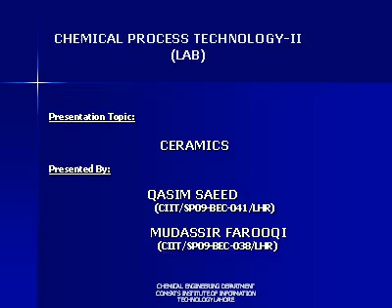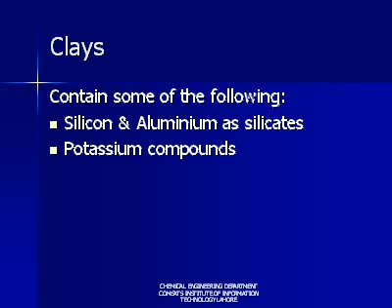Ceramics are a wide-ranging group of materials whose ingredients are clays, sand and feldspar. Clays contain silicon and aluminum as silicates, potassium compounds, magnesium compounds, and calcium compounds. Sand contains silica and feldspar, or aluminum potassium silicate.

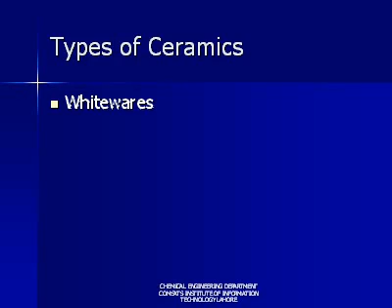Types of ceramics include whitewares, refractories, glasses, abrasives and cements. There is a comparison between metals and ceramics, given on the basis of crystal structure, number of free electrons, metallic bonds, electrical conductivity, atoms, tensile strength, shear strength, ductility, strength and hardness, etc.

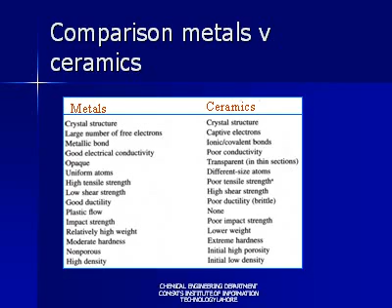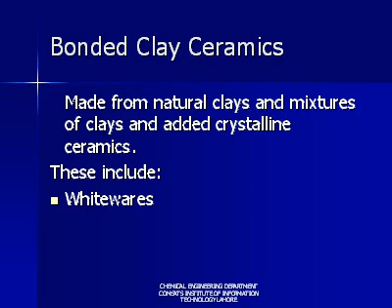Bonded clay ceramics are made from natural clays and mixtures of clays, plus added crystalline ceramics. These include whitewares, structural clay products, and refractory ceramics. Whitewares include crockery, floor and wall tiles, sanitary ware, electrical porcelain, and decorative ceramics.

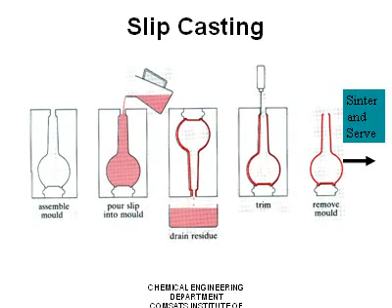Slip casting is a technique used to produce different types of ceramic products.

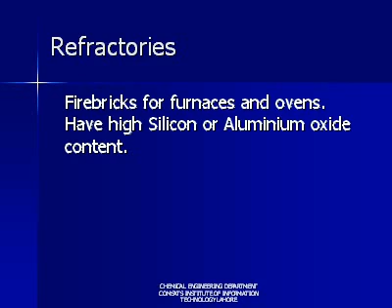Refractories, such as bricks for furnaces and ovens, have high silicon or aluminum oxide content. Brick products are used in manufacturing plants for iron and steel, non-ferrous metals, glass, cements, ceramics, energy conversion, petroleum and chemical industries. Refractories are also used to provide thermal protection of other materials in very high temperature applications.

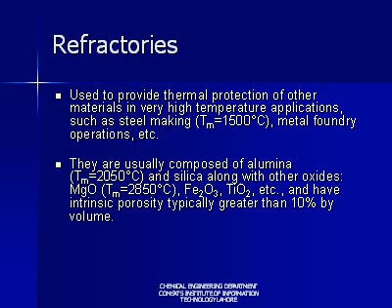They are usually composed of alumina and silica along with other oxides, for example magnesium oxide, ferric oxide, titanium oxide, etc., and have intrinsic porosity typically greater than 10% by volume.

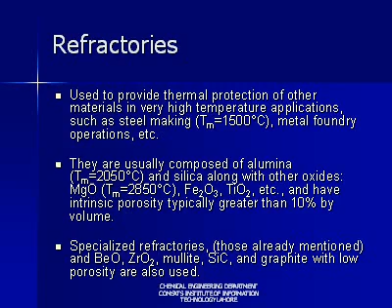Amorphous ceramics, or glasses, have silica as their main ingredient. If cooled very slowly, the material will form a crystalline structure. If cooled more quickly, it will form an amorphous structure consisting of disordered and linked chains of oxygen and silicon atoms.

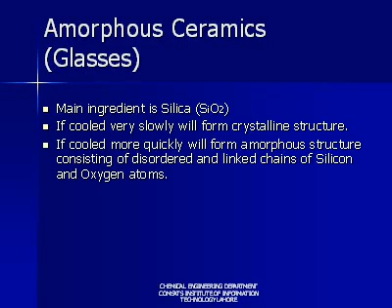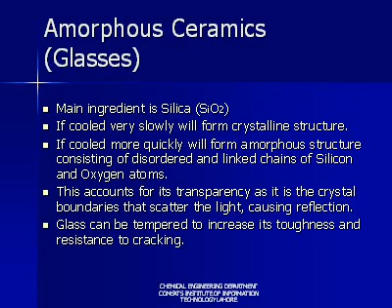This accounts for its transparency, as it is the crystal boundaries that scatter light, causing reflection. Glass can be tempered to increase its toughness and resistance to cracking.

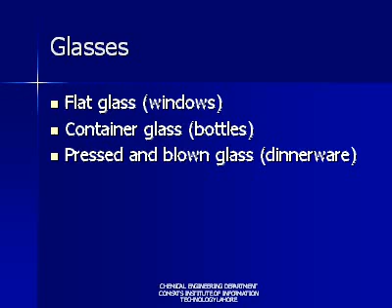There are three common types of glasses: soda lime glass, lead glass, and borosilicate glass. Furthermore, there are flat glass, container glass, pressed and blown glass, glass fibers, and advanced or specialty glass.

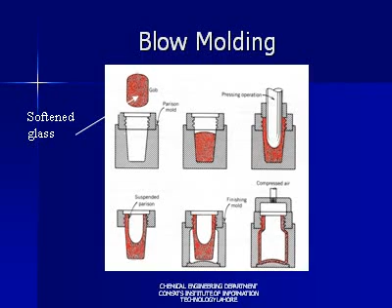Tempered glass: the strength of glass can be enhanced by inducing compressive residual stresses at the surface. The surface stays in compression, closing small scratches and cracks.

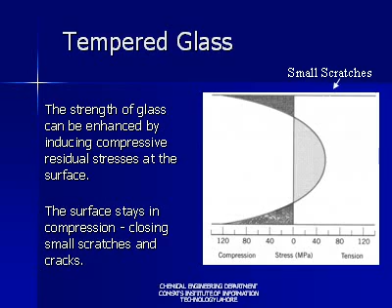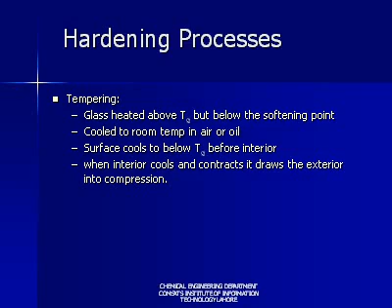Hardening processes are used to produce special types of ceramic materials. In tempering, glass is heated above the glass transition temperature but below the softening point, then cooled to room temperature in air or oil. The surface cools to below the glass transition temperature before the interior, and when the interior cools and contracts, it draws the exterior into compression.

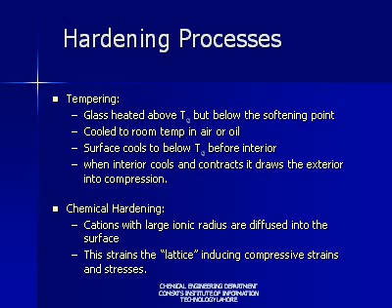In chemical hardening, cations with a large ionic radius are diffused into the surface, creating compressive strains and stresses.

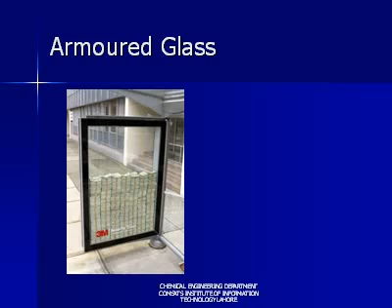Armored glass: many have tried to gain access with golf clubs and baseball bats, but the glass remains intact. From time to time, a local TV station shows videos of those trying to get at the cash, but these are special types of glasses which are hard.

Crystalline ceramics are good electrical insulators and refractories. Magnesium oxide is used as insulation material in heating elements and cables. Aluminium oxide, beryllium oxide, boron carbide, and tungsten carbide are also used.

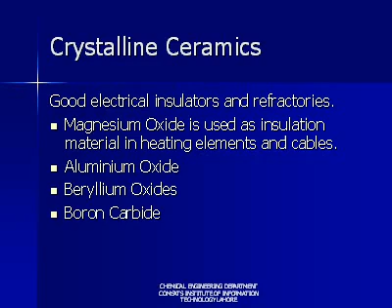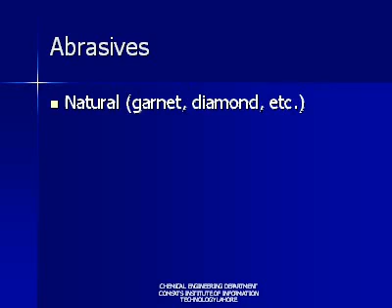These are used as abrasives and cutting tool tips. Abrasive materials are of two types: natural and synthetic abrasives. Synthetic abrasives are used for grinding, cutting, polishing, lapping or pressure blasting of materials.

Cements are widely used ceramic materials which are used to produce concrete roads, bridges, buildings and dams.

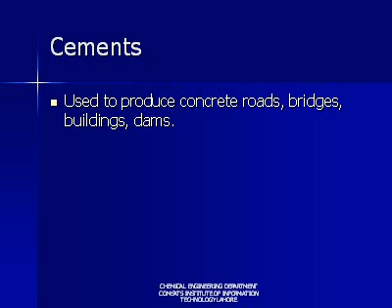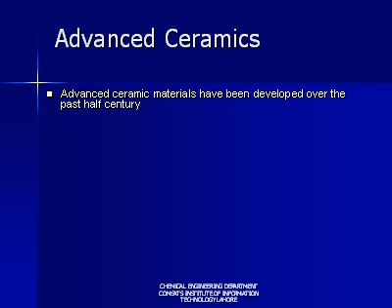Advanced ceramic materials have been developed over the past half century. These are applied as thermal barrier coatings to protect metal structures, wearing surfaces, or as integral components by themselves. Engine applications are very common for this class of materials, which include silicon nitride, silicon carbide, zirconia and alumina.

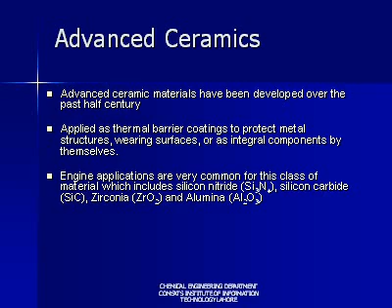Heat resistance and other desirable properties have led to the development of methods to toughen the material by reinforcement with fibers and whiskers, opening up more applications for ceramics.

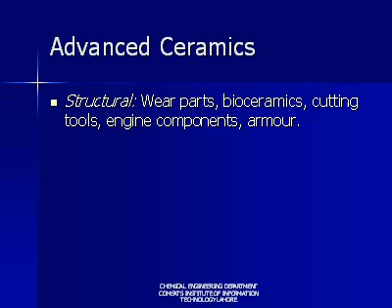The uses of advanced ceramics can be classified into four classes. These are structural, which contains wear parts, bioceramics, cutting tools, engine components, and armor; and electrical, which contains capacitors, insulators, integrated circuit packages, piezoelectrics, magnets, and superconductors.

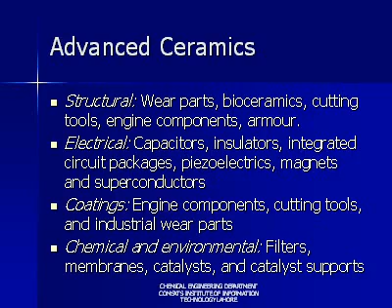The other class is coating, which involves engine components, cutting tools, and industrial wear parts. The final class is chemical and environmental, which includes filters, membranes, catalysts, and catalyst supports. There are engine components which are composed of ceramics.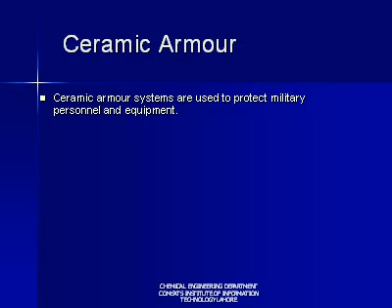Ceramic armor systems are used to protect military personnel and equipment. The advantage is that the low density of the material can lead to weight-efficient armor systems. Typical ceramic materials used in armor systems include alumina, boron carbide, silicon carbide, and titanium diboride.

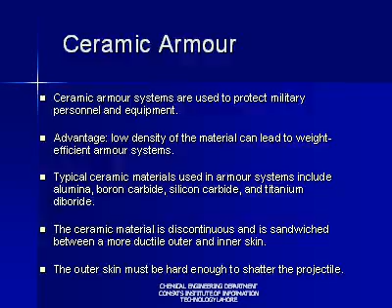The ceramic material is discontinuous and is sandwiched between a more ductile outer and inner skin. The outer skin must be hard enough to shatter the projectile. Most of the impact energy is absorbed by the fracturing of the ceramic, and any remaining kinetic energy is absorbed by the inner skin.

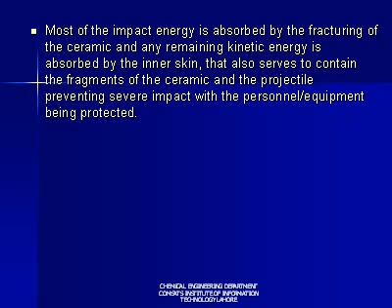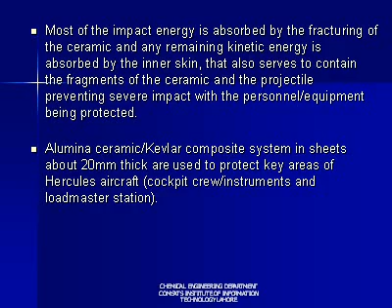The inner skin also serves to contain the fragments of the ceramic and the projectile, preventing severe impact with the personnel or equipment being protected. Alumina ceramic or Kevlar composite systems in sheets about 20 mm thick are used. This is a general kind of ceramic composite.